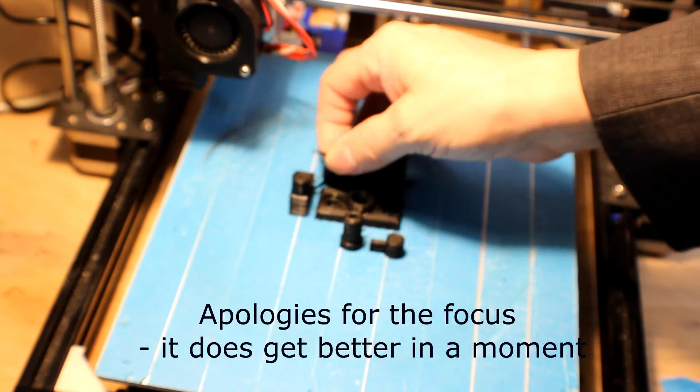Okay, yes. I have to adjust the settings. I've got a bit of stringing here, look, between these two parts where it's crossing over from one to the other. Let's see if we can get these off. They'll break off okay.

If anybody's had to do support material before, they'll be fully familiar with trying to dig this out of here. At some point I'm going to have to get a dual extruder with PVA filament, which is dissolvable, and that will print support in PVA, which I can then just dump into water and it will dissolve the PVA away.

So generally it's not too bad. So I'm going to need to do a bit of clean up on that, but we've got all the pieces that we need, and I'll bring you back in a moment once we've assembled it. Off of that. Cool, back in a bit.

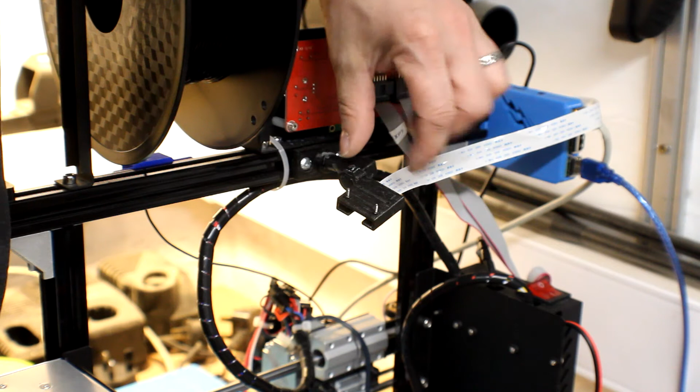Okay, we've got it installed. Got our 3 articulations, so we can bend this one up and it swivels clockwise, counterclockwise, and similarly we can go yaw as well, so it gives us enough adjustment. Might need to adjust the CAD a tiny bit. The tolerance on the joints is a little bit off, so 2 of them are tight, and 1 of them's very loose, so I might readjust that.

You have to think about the placement of the camera a little bit. It's okay there, but you can't see much of what's actually printing, so what I really need to do is get it down at this level so that we're looking in. That might mean a longer arm or something off the extrusion, but I have to be a bit careful to make sure obviously the moving parts don't bash into it. I'm thinking it might be on this corner, but that needs a very long cable at that point, so I'll have to see if I can get a longer ribbon and see how it goes.

But for now, yes, this is all done. You can see there's 2 fixing screws which hold the actual Pi camera module inside this housing, and the lens is just underneath there, and it's all rigged up through OctoPrint, and I can see this now from my office.

So basically I can do CAD, send it straight down to the printer, providing of course there's nothing on the bed and that's all prepped up and ready to go. I can just hit print in the office and away it goes, which saves me a lot of time, and also means if anything goes wrong, and sometimes it does, then I can see that immediately. So great, there's another upgrade for the printer.

Okay, welcome back to the Fusion 360 part of this video. And this bit of modelling is going to be no different really than any other, other than I'm going to whiz through most of it because I had to do quite a few operations. You can see from the timeline at the bottom, it goes on for quite a while, and we'd be here for a couple of days if I went through everything, so I'll pick out a few highlights.

So anyway, to start the model off, I thought the best thing to do here was actually put the Pi camera module into CAD itself, and you can get the dimensions of the camera module from the Raspberry Pi Foundation, but I also took the opportunity, as I had one in my hands, to measure it with the digital calipers, just to check, because sometimes manufacturing on these can be a little out of tolerance, and probably a good idea I did that because it was slightly wider than the dimensions on the Raspberry Pi Foundation website.

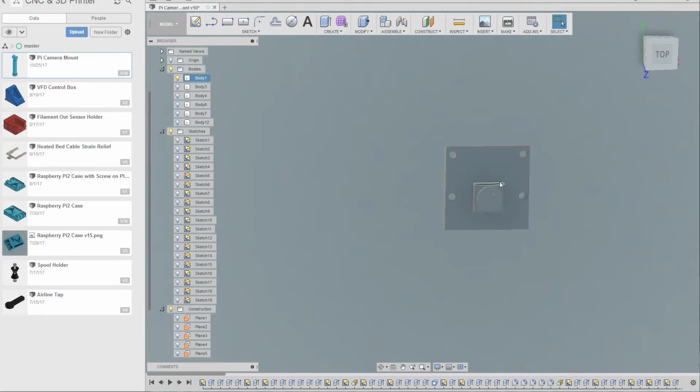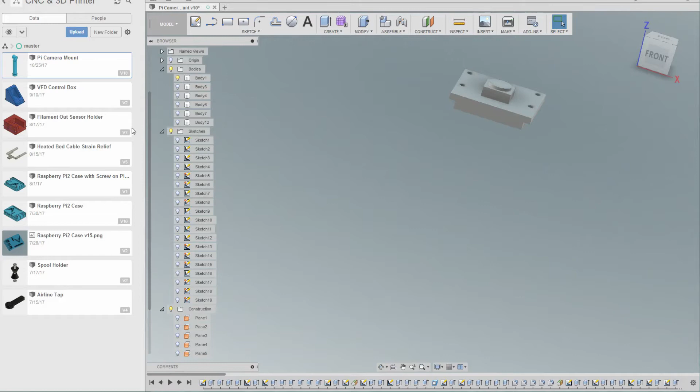So anyway, this was a fairly trivial object to sketch up. It's basically a square with another square in the middle, and then a number of circles to either extrude through and cut through the body for these holes, or extrude out to give us essentially the lens shape and height off of the board. Also put a piece on the back here, which is where the ribbon connector will connect into, which was very handy because that gave us a dimension to cut a slot through the bottom, if you like, of the actual holder, which essentially is just another sketch.

Let me bring those up quickly. So there's the one for the camera, and there's the one for the holder, which is really just an offset of the outline of the camera module itself.

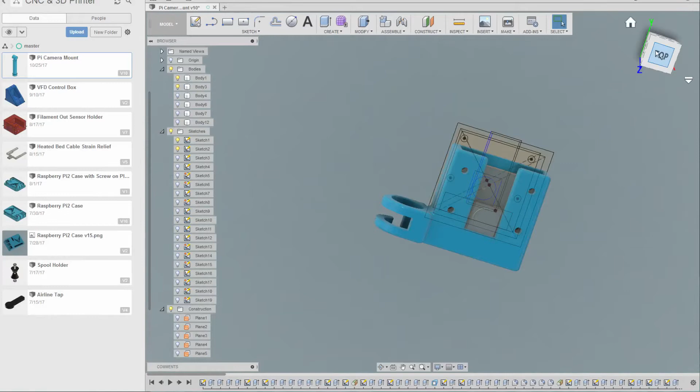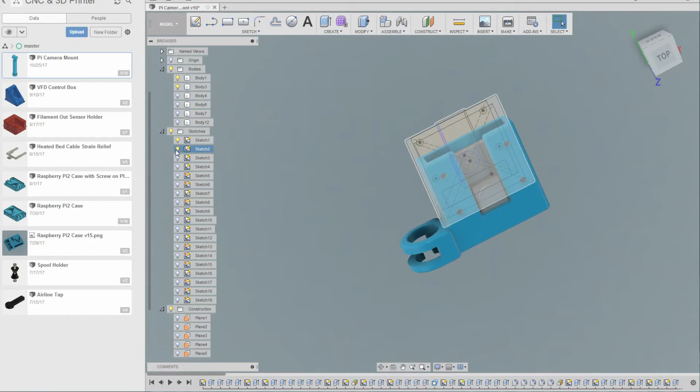Now you'll notice that they're in a slightly different position, and that's because when I first did this model I made a bit of a mistake by confusing the axes of rotation, and ended up with two axes rotating in the same direction within 3D space. So I only had two points of articulation, and you need three to be able to position the camera in any position once you've fixed it to the frame. So there we go, there's the outline, or the shell if you like, that's going to hold the actual camera module itself.

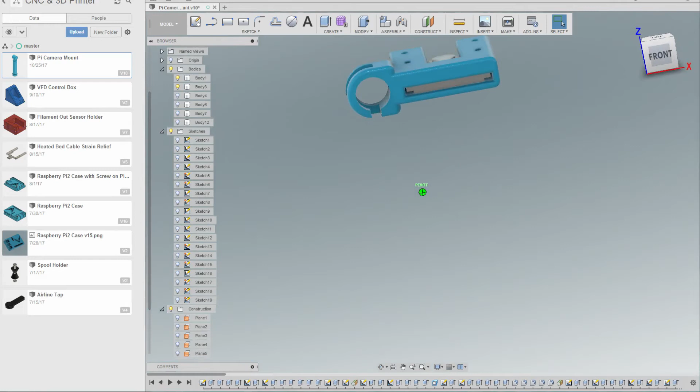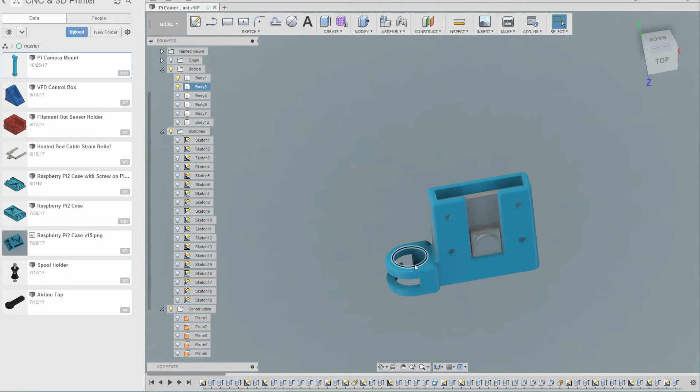There's a slot at the front so you can put the camera module into it, and then another slot at the bottom so the ribbon cable can go in there and connect up to the camera module. This piece here was just basically a rounded rectangle extruded out, and then with a hole cut all the way through, put a construction plane over here, and then cut a rectangle through this down to this plane here, and then also put a slot, another small rectangle just to cut into this piece here.

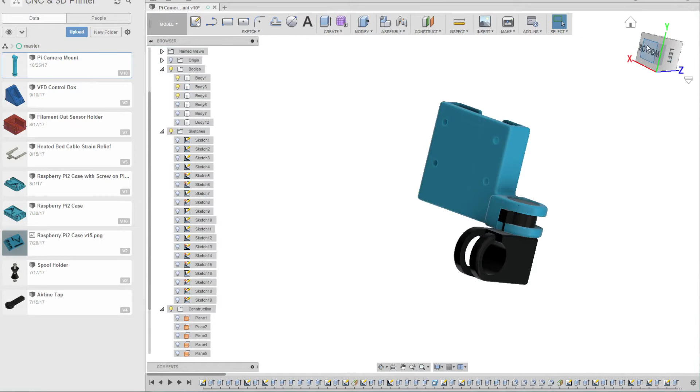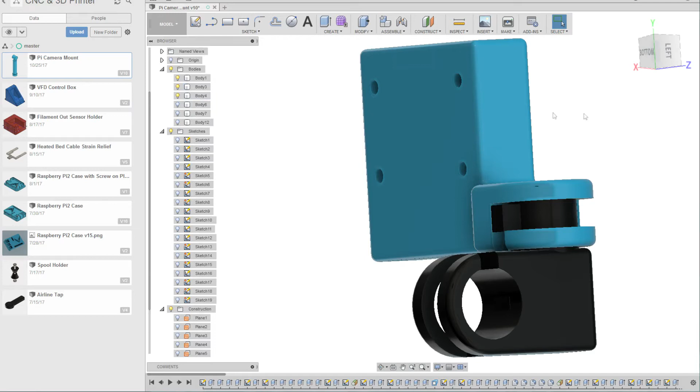And the reason for that is, if I bring up the next body, and it's handily coloured differently, you can see that essentially you can have a keyed cylinder inside that, and I also made that 0.2 of a millimeter in radius smaller than the outside shape, so that there's a bit of tolerance there, and that pretty much worked okay. And similarly here you've got some tolerance above and below this key so that this can actually fit into this slot, and then you can articulate this around the left and right axis as we're looking at here, so kind of a yaw if you like in this direction.

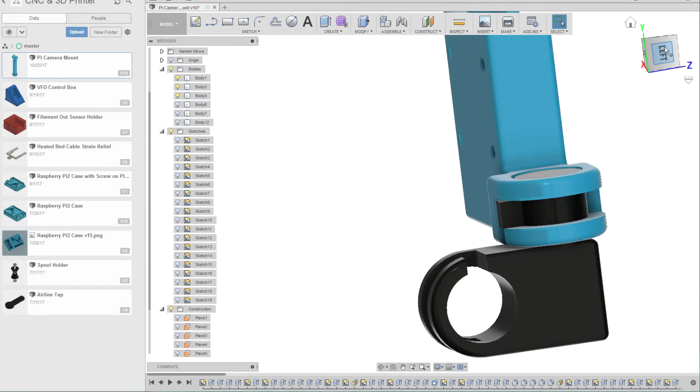And again did essentially the same shape as this one, just a bit bigger obviously, so we can fix this post to it, and cut the same arrangement into this area as I did for this blue piece up here. And that then gives us our next object, which is again another keyed post that goes into this hole, again with the same tolerances, so we've got a bit of play there, and we can actually move this.

I did actually have to expand the tolerance a little bit. The first time I did this it was way too tight. You could just about force it together and then it wouldn't articulate without breaking off this quite delicate piece here. And in fact what I should probably do is make this thicker in this direction, so that this piece is actually a bit stronger, but it's held up okay and it's not subject to massive amounts of vibration, so it's okay.

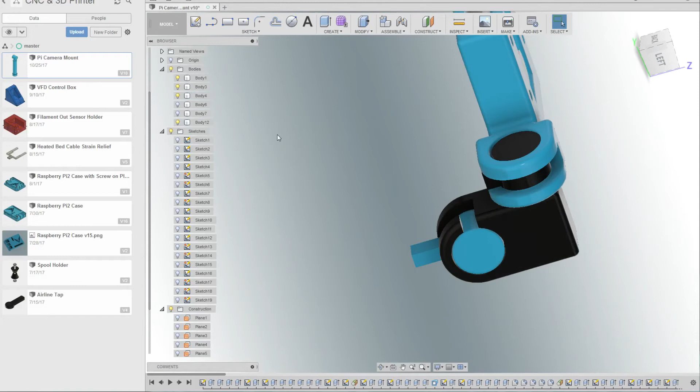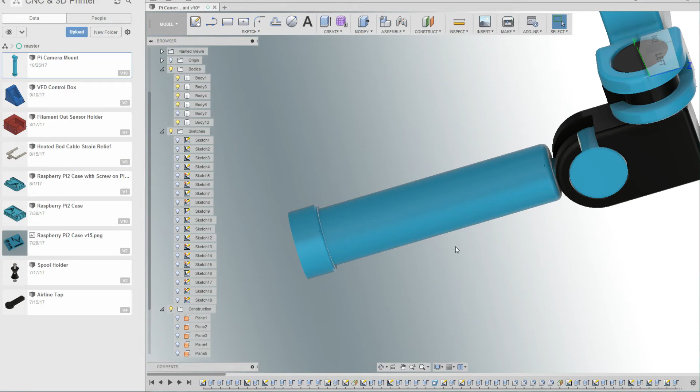And then what we've got is an extruded post, and this is actually a version 2 with a longer post, so I can mount this on the extrusions on the 3D printer that are on the base of the printer, rather than where you've seen it on the video where it was kind of on the gantry, for want of a better expression.

And also extruded a hole in the top. If I just remove that one there, there you go, you can see that this key here can then fit into a square hole in the top, or a rectangle hole in the top, and fix these two pieces together. And that's quite tight as well, so that's pretty good. You don't even have to glue that, which means you can take it apart again later on if you need to.

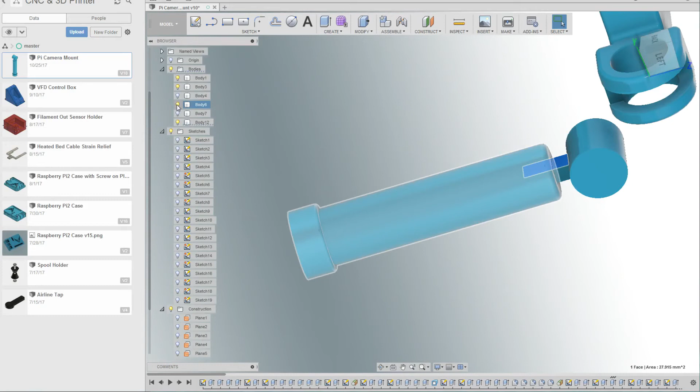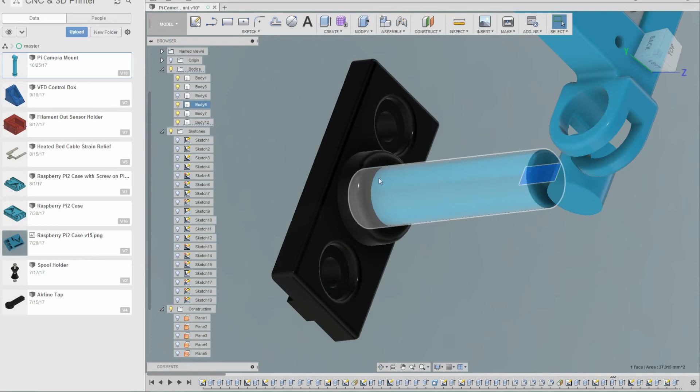And all that really leaves us is a base piece, so we can actually affix it to the 3D printer, and that is, as it looks, a big rectangle, a number of circles to do the hole for the M5 bolt that goes through there, and then obviously a countersink just to make that look pretty, bit of a flange extruded up here, so that this post can sit in it. And you'll notice that the bottom of the post, if I just switch that off, there's this flanged area there which sits inside and locks in place. That sits in a recess there.

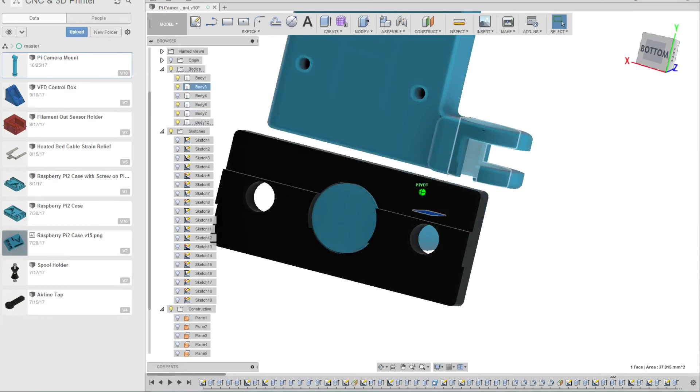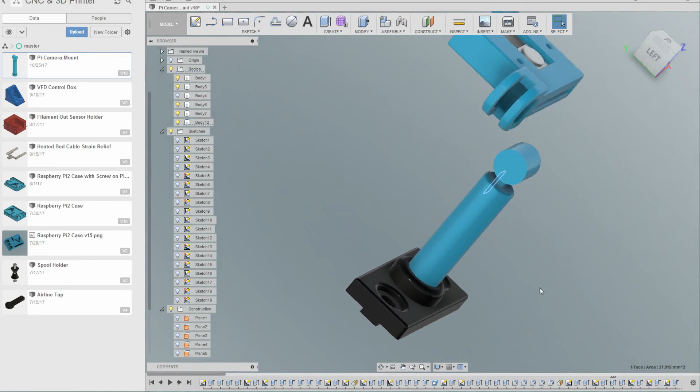Then all we needed to do was extrude a piece out, another rectangle, and then cut that through when we did that hole, and that creates again like a key which fits into the slot on the aluminium extrusion on the 3D printer. And we're pretty much done. You'll notice though that what I've done throughout this model is I've filleted most of the edges. A, it makes it look a bit prettier, B, you don't have sharp edges, so that's pretty handy.

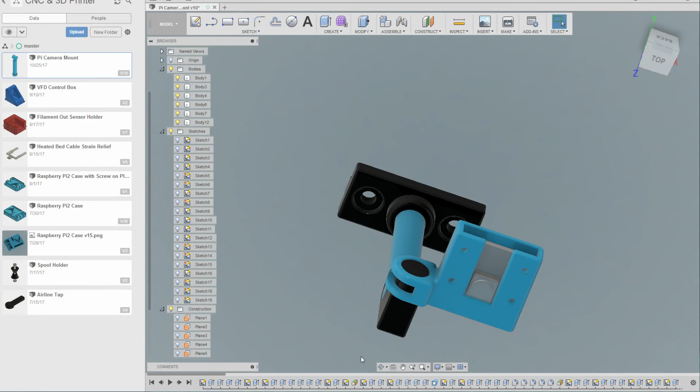Now the other thing is, because I had to move this holder and the camera to get the eventual shape with 3 axis of articulation, so we've got a rotation around here, a rotation around this axis, and then a rotation around this axis as well. In order to do that, I had to move this shape and the camera and the holder relative to where they were originally on the sketch.

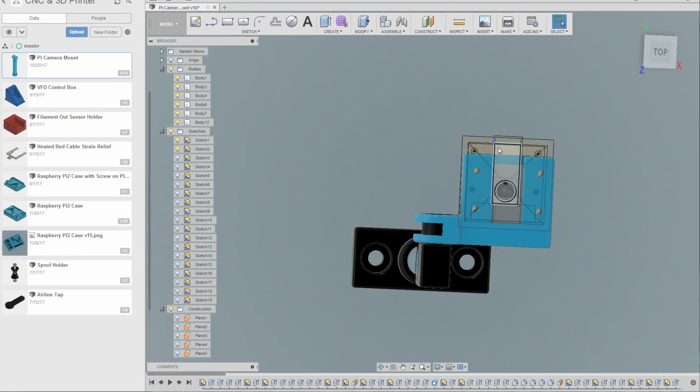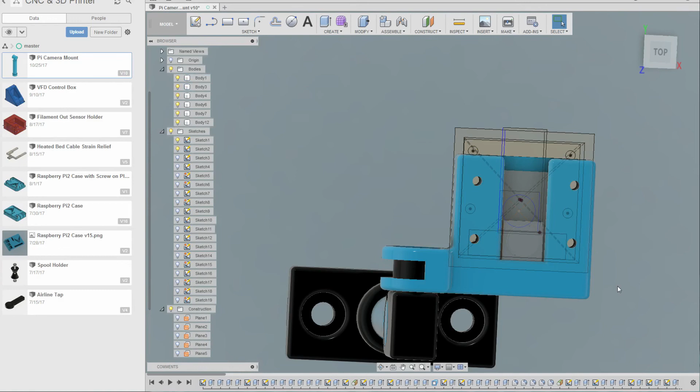Now, the good thing about this is it still maintains the relationship between the sketch and the extrusions, so that if I wanted to widen these screw holes, which I didn't need to do in this case, but if I did, I could change the sketch dimensions and that would flow into these 3D areas of the model correctly, so it doesn't break the association, which is really handy.

So that was basically all there is to this. It's not particularly difficult, although it took me, like I said, a couple of goes just to make sure I could get my head around the articulation I needed and where I'd have to put the joints.